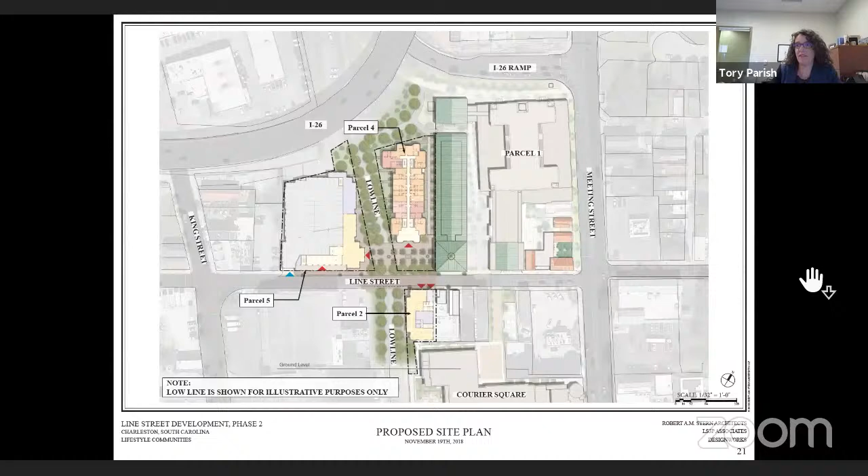We just have a few slides of the project. To refresh your memory.

This is a vested right 2nd year approval extension requiring automatic board approval if submitted in a timely manner, which is good for 1 year and may be renewed 4 more times in 1-year increments. Per ordinance section 54962, this extension is to expire on November 28th, 2022. Approval of a second 1-year extension of conceptual approval to expire on November 28th, 2022 is our recommendation.

Okay, do I hear a motion from the board? Move for approval. Okay, and a second? A second, Carol Wheeler. All right, motion made and seconded.

I'll call the roll. Ms. Subcheck, how do you vote? Yay in favor. Mr. Metters? Yay in favor. Ms. Wheeler? Yay in favor. And I vote likewise. The motion carries 4-0. Okay, agenda item number 2 is 52 Line Street.

Request second 1-year extension of conceptual approval originally granted February 13th, 2019 for parcel 5, Cannonborough, Elliotborough, Old and Historic District. We've got a few slides to refresh your memory.

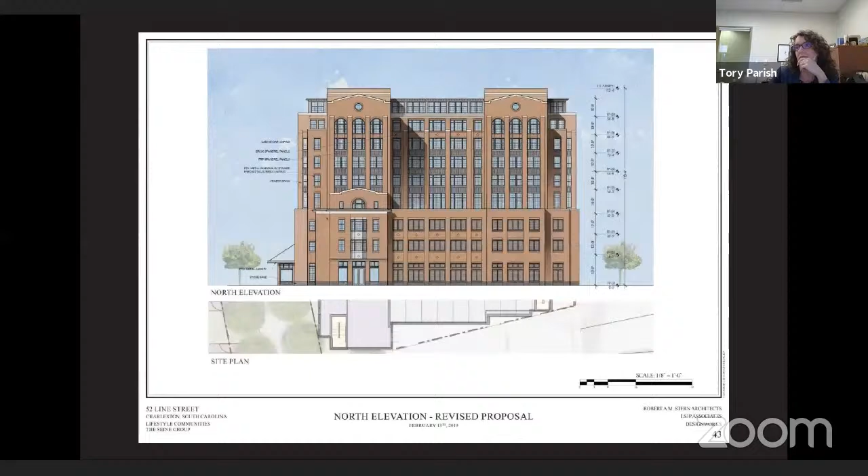Whoa, so fast, just trying to open something. This is a vested right 2nd year approval extension requiring automatic board approval if submitted in a timely manner, which is good for 1 year and may be renewed 4 more times in 1-year increments. Per ordinance section 54962, this extension will expire February 13th, 2023. Recommendation is approval of a second 1-year extension of conceptual approval to expire on February 13th, 2023.

Hearing all that, do I hear a motion from the board? I'll make a motion. Okay, go ahead. I'll give the motion to Mr. Metters. Ms. Wheeler, would you give a second? Second. All right, there we go. All right, I'll call the roll.

Ms. Subcheck? Yay in favor. Mr. Metters? Yay in favor. Ms. Wheeler? Yay in favor. And I vote likewise. 4-0, it is approved. Sorry, Carol.

Number 3 is a request for first 1-year extension of approval for partial demolition of rear 2-story addition. This project is at 284 King Street. It's downtown Old and Historic District. And we have Tara Romano here.

I want to see if she wants to add anything. Tara, are you there? Tara? Hey, sorry, no, I don't have anything to add.

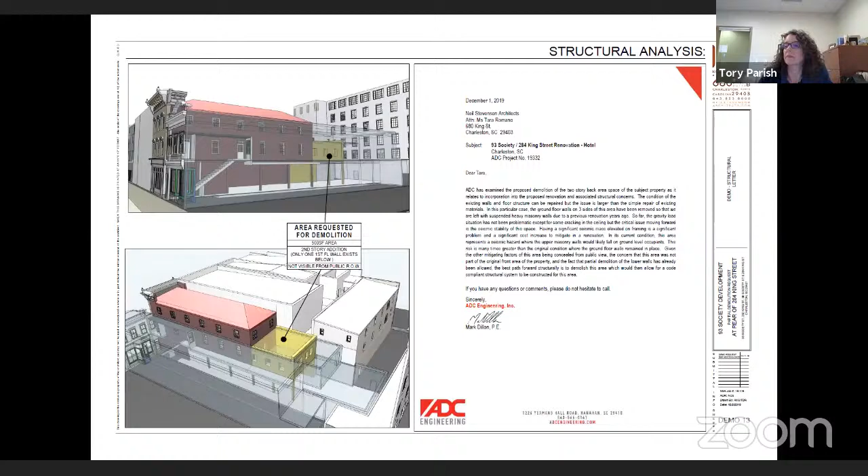This is a vested right, first year extension requiring automatic board approval for partial demolition if submitted in a timely manner, which is good for 1 year and may be renewed 4 more times in 1 year increments. Per ordinance section 54962, this extension will expire December 11th, 2022. Recommendation is approval of a first 1 year extension of approval for partial demolition to expire on December 11th, 2022.

Okay, all right, motion from the board. This is Carol Wheeler, I make a motion for approval of a first 1 year extension of this project. Okay, and a second? I will second. All right, I'll call the roll.

Mr. Metters, how do you vote? Yay in favor. Ms. Subcheck? Yay in favor. Ms. Wheeler? Yay in favor. And I vote yay in favor. 4-0, the motion is approved. Thanks, guys.

Okay, moving on to agenda item number 5. 609 King Street. The request is final approval for partial demolition, stabilization, and relocation of the structure. The building is not rated. It's in the Cannonborough, Elliotborough neighborhood, constructed between 1925 and 1935, and it sits within the old and historic district.

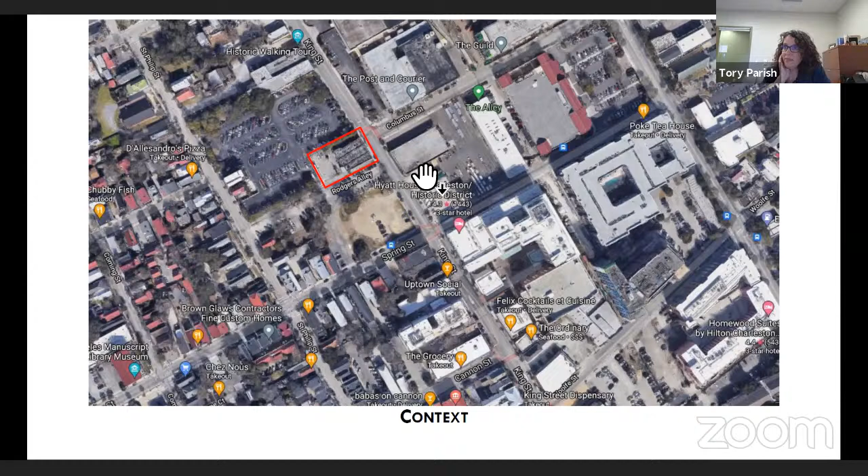Got some context slides for you here. An aerial, you'll see King Street, and the building sits at the terminus of Columbus Street next to Rodgers Alley. You're probably very familiar with this. Looking sort of south on King Street, and looking south, and then looking towards Columbus Street. And then we've got an old survey card from 1985.

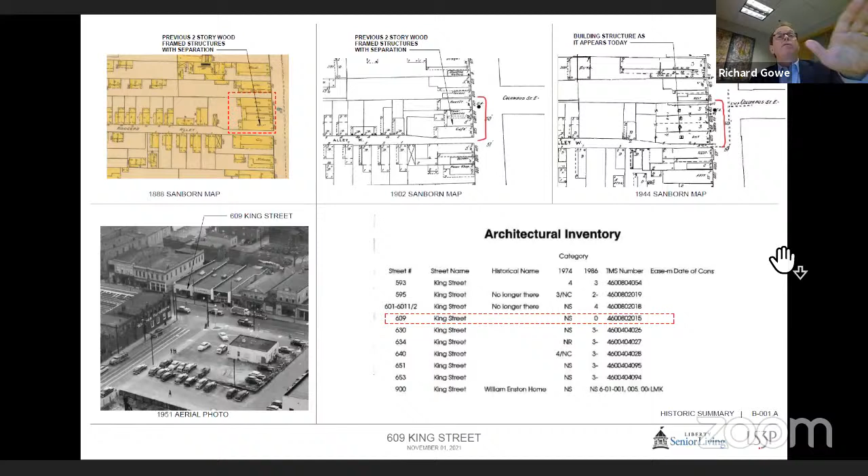It's interesting when you look at the Sanborn maps, the relative variety of the depths of buildings compared to the widths. In particular on this map, you can see the frequency of change from 1888 to 1902 to 1944 in the subject structure — three different periods of mapping, three different depths. So our conclusion is that the width is more important than the depth when it comes to creating a streetscape such as King.

These are close-up images of the facade. We have captured all of this detail in our scan and placed it into a Revit model to document the building. In general, this particular facade, which we consider to be most of the contributing fabric of the structure, is made of brick with a stucco skin over it, and all of those moves made on the facade are from turning bricks and pushing them in and out.

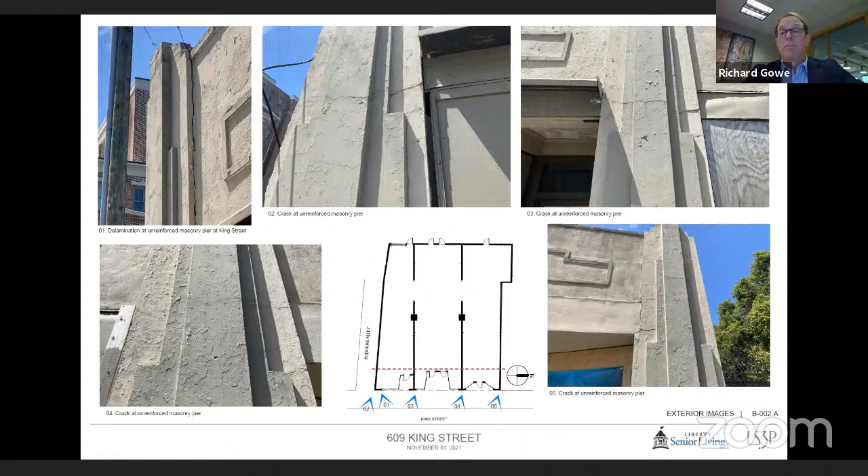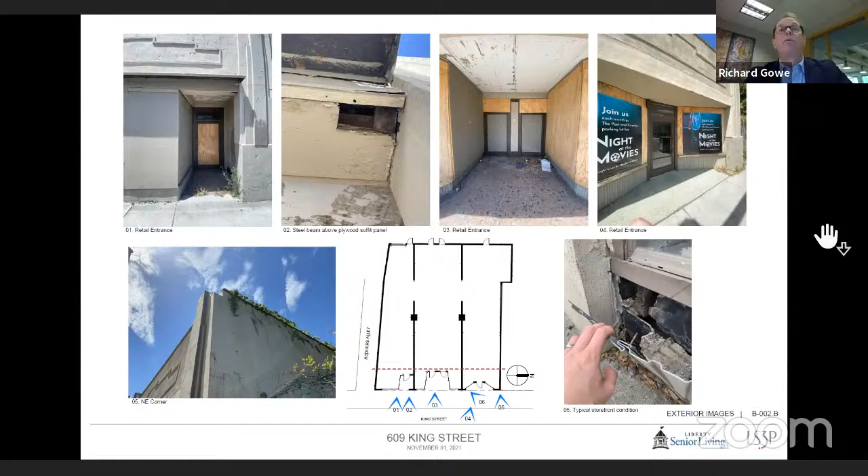This is the north wall. And this is the south wall. You can see we have a line drawn here that signifies about 12 feet off of the facade. This is the minimum we think needs to be saved to capture the essence of the structure and most, if not all, of the contributing features of the building.

In conversations with the historic groups, we did suggest 25 feet as a starting point would work. That would extend just past the first drop in the parapet, just to the left of that red line, and it would incorporate another one of the little hidden windows that was put in and then covered up.

When we look ahead to the next agenda item, you'll see why we suggest 12 feet. Because of the placement we're asking for this building to be moved to, we have the option to save a few more feet of the south facade in an effort to increase the amount of historical fabric. We are willing to do that. We want you to know that even though these documents say 12 feet, it's not a hard and fast number. We consider this facade to be the contributing fabric.

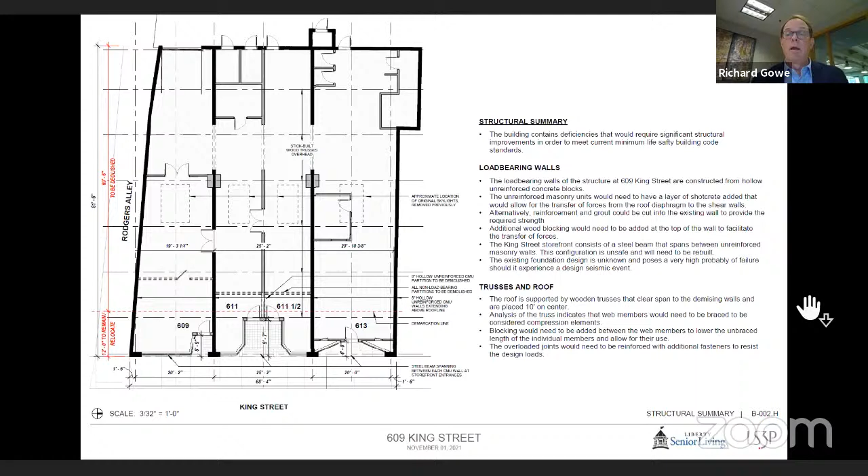We don't move buildings for a living, okay? We generally renovate buildings and do new buildings, but we've taken this very seriously. We spoke with a company called Carolina House Movers, who have an engineer they work with, Eddie Porcher. Based on their review of the interior and exterior of the building, we are supremely confident they can accomplish the storefront facade relocation as proposed.

A design build engineer will prepare the design for the temporary bracing, the relocation methods, and the structural stabilization of the existing building. This same engineer will design the foundation for the relocated facade. A lot of thought has gone into this relocation—it's a major undertaking, and I'd like to share a few steps we think need to be taken, as discussed with Carolina House Movers. For reference, they've moved lighthouses intact, beautifully, plumb, and placed them in new spots, so they are the real deal.

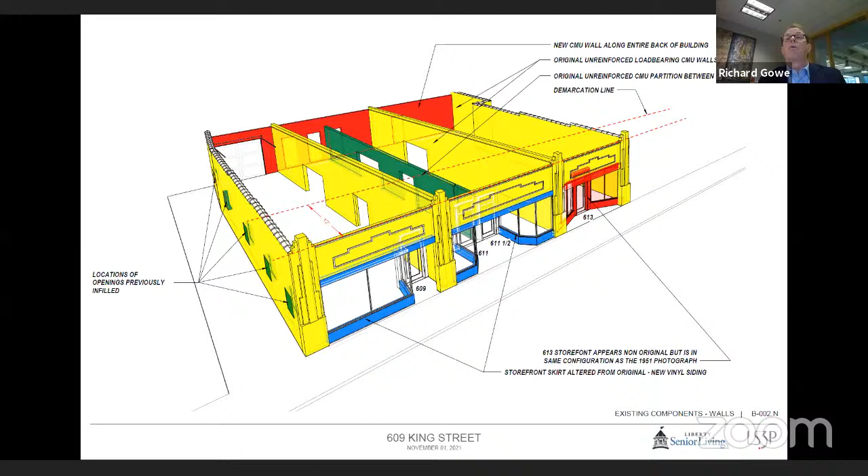Next, and my colleague Mr. Risch has prepared another slide showing in more detail, indicating that the decking appears to be all non-original. The framing is a standard pre-1953 2x common framing, as is the ceiling framing. The trusses are 2x material as well, appear to be original. I will say that they are original, but the detailing isn't very unique in any way.

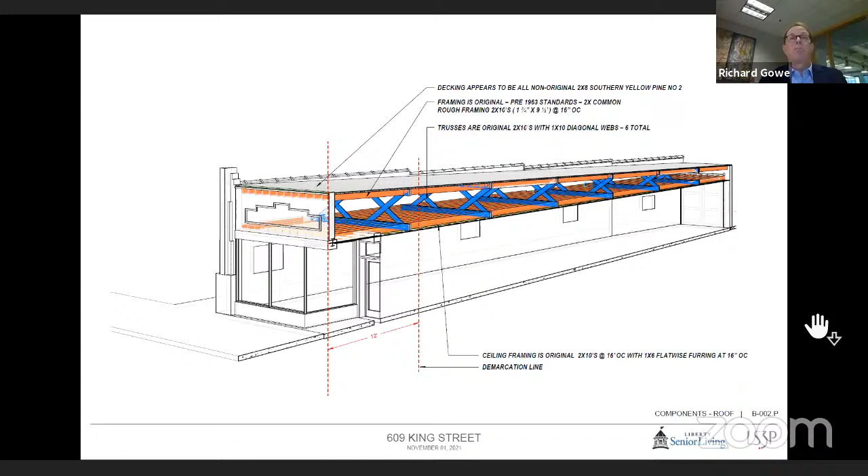It's intact. You can see the line of demarcation that we're proposing here, just past that first truss. Next.

And here is a section of what we would be saving and the configurations, and we have a lot of details, and we'll produce all the details. Would you please go to the last slide in the packet - I'll just make some closing remarks.

We appreciate the input of the historical groups and the city in getting to this point, and we hope that the board sees this as a win-win for the neighborhood, the historical groups, and the development team. And to any skeptics in the crowd who might not want to set a precedent, we could say this.

There have been entire buildings moved in the city previously, including a church building from Pitt to Calhoun Street. A building was moved during the renovations of the county courthouse and sits proudly on Broad Street today. And multiple buildings we were involved with over on the Line Street project.

Moving buildings is not for any project. It's for projects that have greater good and urban implications, and here are a few reasons we think this is a good candidate. Its contributing fabric, although relatively small, is very important in a cultural way, but where it's located is not necessarily that important. And it's pretty easy to achieve moving something of that size. So we think that's a criteria.

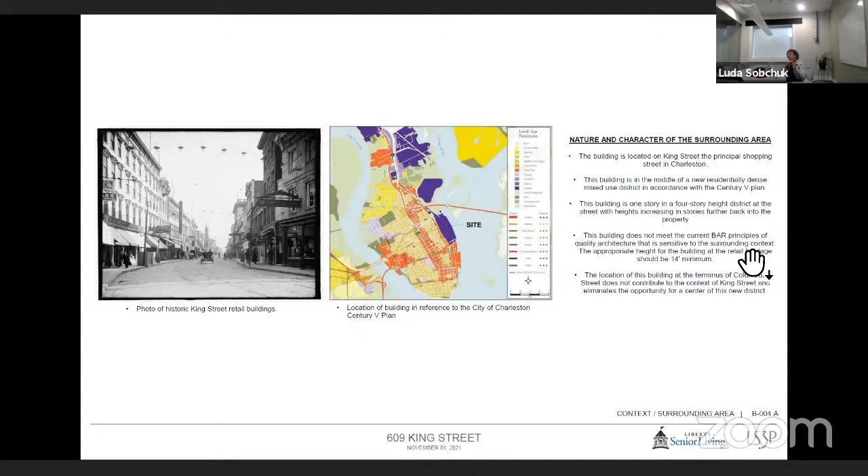That's kind of what I'm saying. So I'm still thinking that we can— I would support the relocation and partial demolition, but it needs to be much more meaningful than it is right now.

Mr. Chairman, James, go ahead. I think that, if I'm understanding everyone correctly, there is going to be support for relocating the structure, but there needs to be a plan resubmitted showing an increased depth of the slice area that is to be relocated. Is that what you're hearing also? That is what I'm hearing.

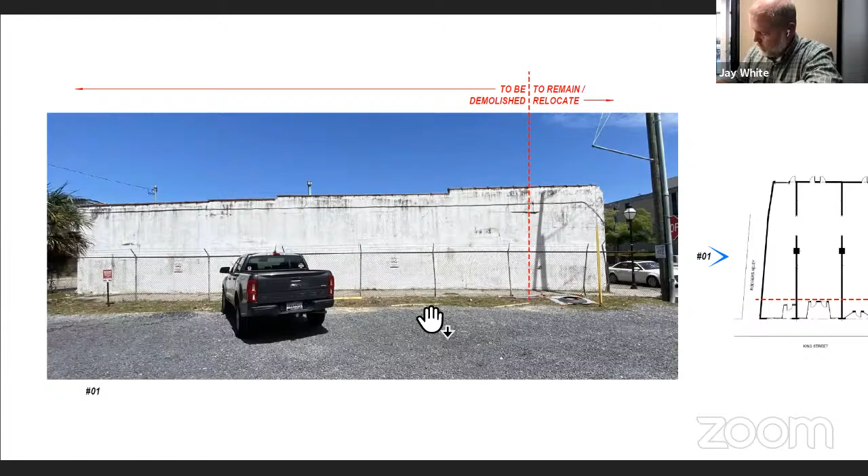Well, so Mr. Chairman, I would make a motion for a— I'm sorry, James, I'm sorry. May I ask a question?

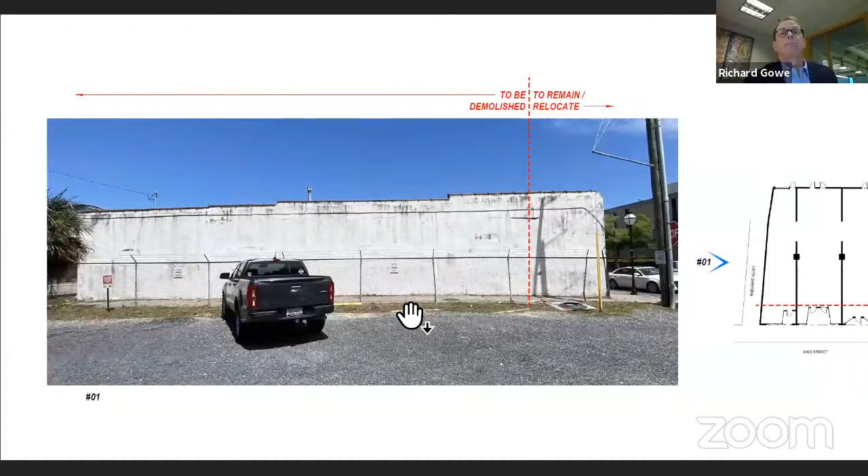Richard, could you preserve that whole wall as it is on this photograph and incorporate it? If you would, go backwards and look at the plan. Well, I don't know if it's of any value here. I'm just asking, and if my colleagues think it is of value, I don't know. But I think 25 feet definitely past that first step is definitely possible. The wall does angle in a great deal. Okay, but the first 25 feet would be okay.

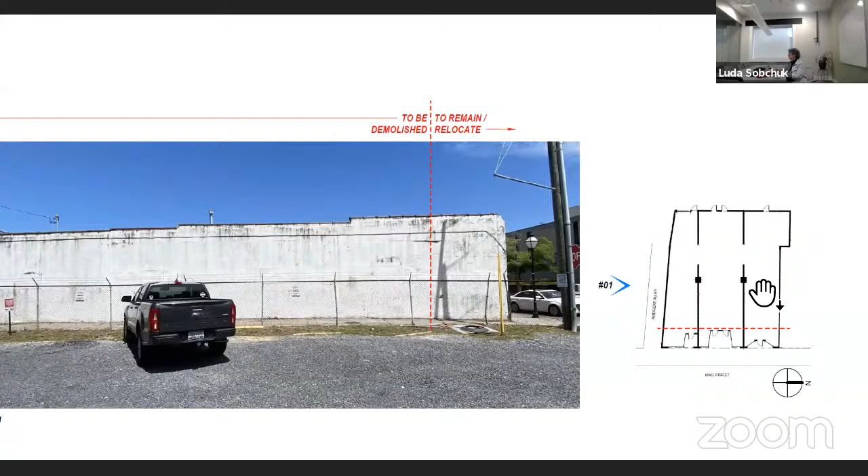You were just talking about some kind of history that will be shown on that alley, so I didn't know how you're going to do that, but anyway, that's sort of settled here. I mean, that wall could be, if you're showing a mirror or whatever, I don't know. I'm done, sorry. Okay, any further comment or motion?

James, are you going to do it? I cut you off, sorry. No problem.

Mr. Chairman, I'm going to ask a question before I make my motion. Would you like to ask Richard if he'd prefer to simply withdraw in order to come back with a different depth he could slice the building to, or would he prefer a deferral with a specific request?

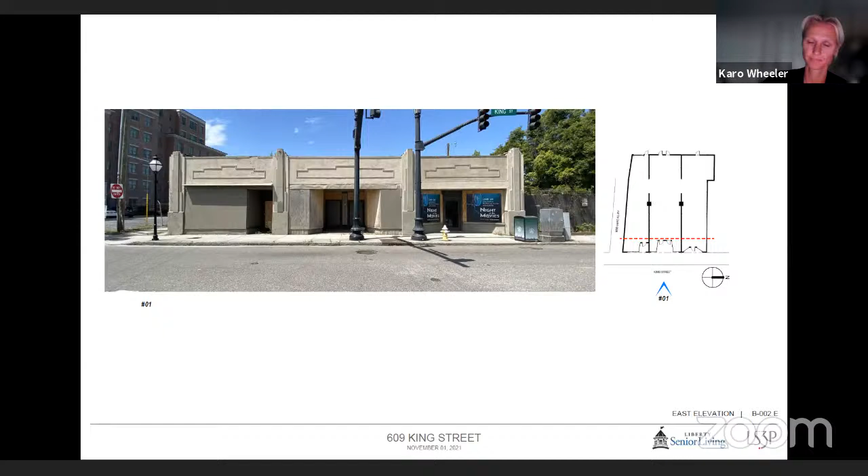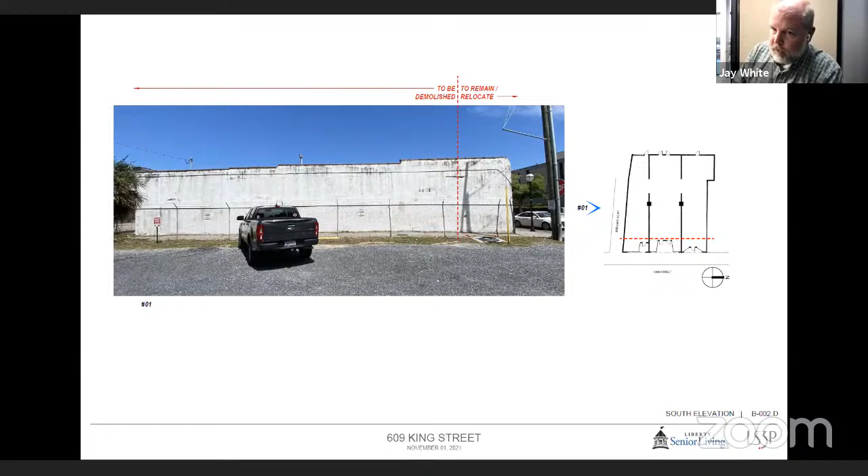Maybe all of that can be restated as just restudy the depth of the slice. The way I might suggest it be written is as a motion for deferral, requiring that the applicant restudy the resulting building depth in accordance with board and staff comments. Sounds like exactly what I said.

So just to restate that again, this is a motion for deferral with a requirement to study the resulting new building depth in accordance with board and staff comments. Correct. So Mr. Metters has made that motion. Do I have a second? I'll second that. Motion made and seconded, I'll call the roll.

Ms. Wheeler, how do you vote? In favor. Ms. Sobchak? In favor. Mr. Metters? In favor. And I vote likewise. The motion carries 4-0. Thank you.

All right, procedural question. Does that mean that agenda item number 6 is heard or not heard, Mr. Chair? I think this may have broad implications on the height, scale, and mass of agenda item number 6, so I don't think we can hear it.

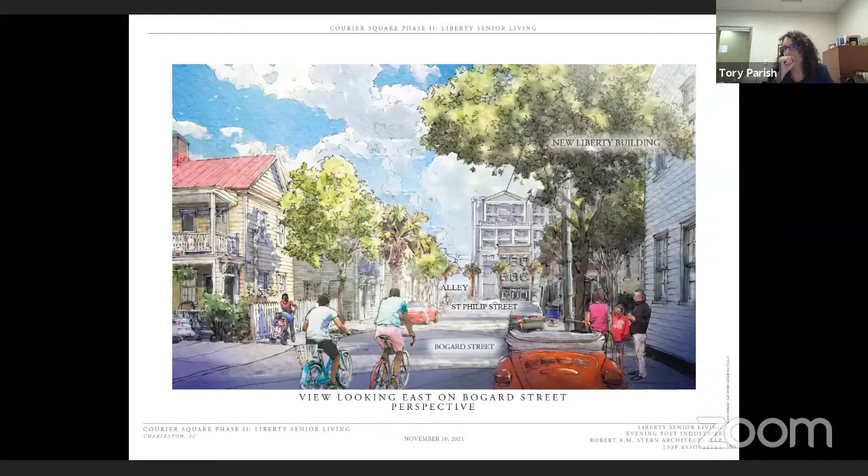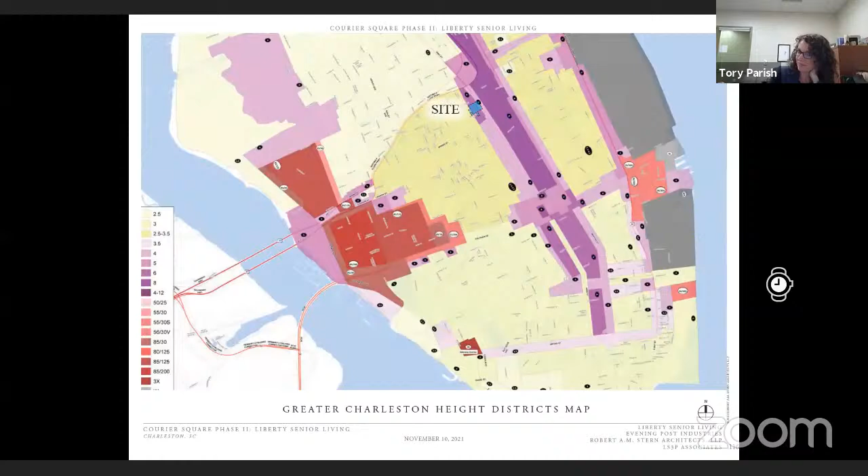Item 7's in there somewhere. Coming. I had visual staff comments for you this time.

Okay, item number 7. Here we go. 649 King Street. This request is for conceptual approval for a 15-unit apartment building with ground floor retail. It's Courier Square Phase 2, Building 2, Cannonborough, Elliotborough neighborhood, Heights District 6, Old and Historic District. The context is something you're very familiar with, as it's north of the block we just discussed.

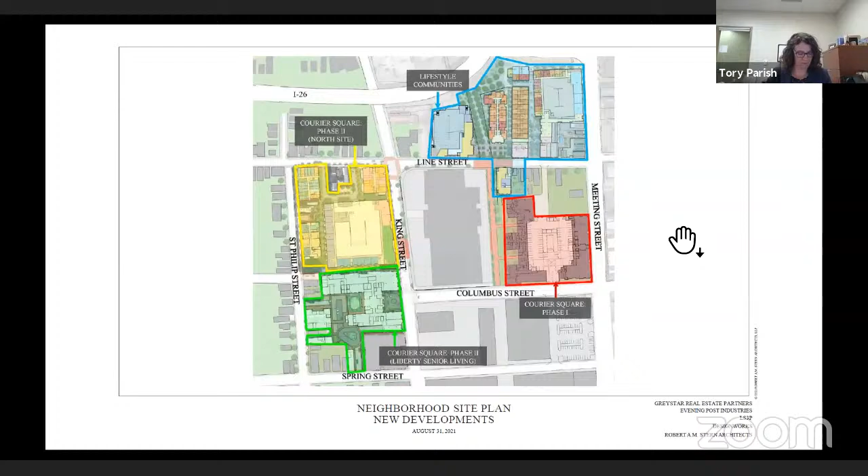But I believe we are jumping right into the applicant's presentation. So we should have Mr. Gow, Brewer, and let me see what else we need. I should have everybody in the meeting on the applicant team. So we're ready when you are.

Rich, are you going to start? Yes, I'm Richard Gow with LS3P, here with Greystar, Evening Post, Rams Design Works, and Seaman Whiteside to talk about the changes to buildings 2, 3, and 4. This is building 2, and I'm going to defer to Mr. Brewer. This is Gary Brewer, partner at Robert Stern Architects. We're glad to be back again.

As has been noted before, we're very dedicated to doing the best building with our team possible for these 3 separate sites. We are passionate at times about our opinions, but we value working closely not only with the board but with Historic Charleston, the Preservation Society, and the neighborhood groups, to work together as we have on the last 7 projects we've brought before this board, to build the best building possible for these sites. Next, please.

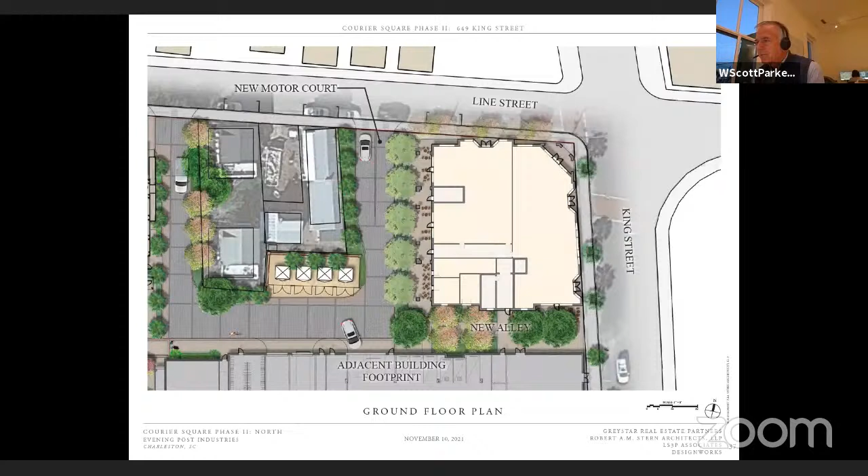Included in the project will be new streetscape all the way around King Street, Line Street, and St. Philip Streets. So that's an overview, and I'll turn it back to Gary. Thanks, Scott. Next, please.

So here you can see the floor plans. Based on the board's comments, we have worked to address those comments, which have included not only changes to the exterior that we will be showing, but also reconfiguring some components of the interior to work with the new proposed exterior. Next, please.

So the summary of the board and staff comments - the basic 2 points were the facade facing King Street, which everybody thought was the most successful facade, and there was concern associated with treating this as a two-building expression in our attempt to address the neighborhood's materials of clapboard. So we have addressed those in the new proposed design. Next, please.

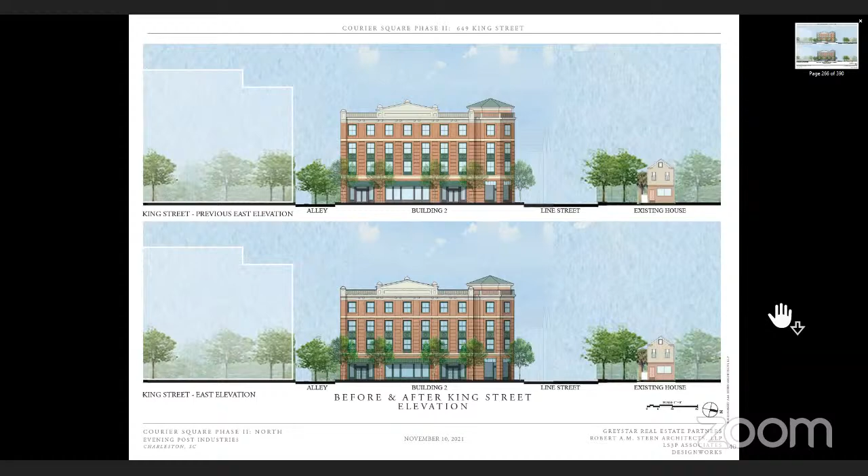So this is the before and after of the facade facing King Street. Next, please. With the plan showing that facing towards King and Line Street, there would be retail at the base. Next, please.

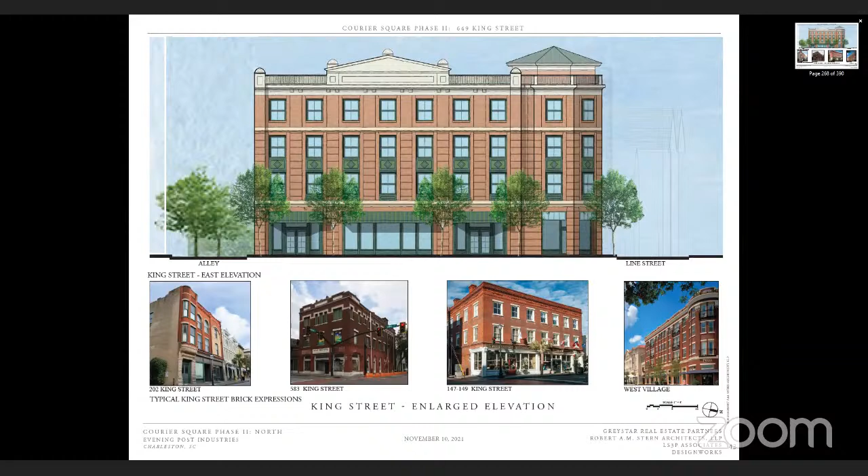Here you can see it at a larger scale, and we're looking closely at brick buildings in Charleston, primarily on King Street, for the inspiration of this design. Next, please. Getting into a larger scale elevation, showing potential ideas of materials and detailing. Next, please.

And then moving around to the north facade. Next, please. And the proposed design - I'm sorry, can you go back one? The earlier design showed two expressions, with a brick and a clapboard building with a party wall, in an attempt to relate to the materials of the adjacent houses. The proposed design on all sides of the building now shows an all brick building. Next, please.

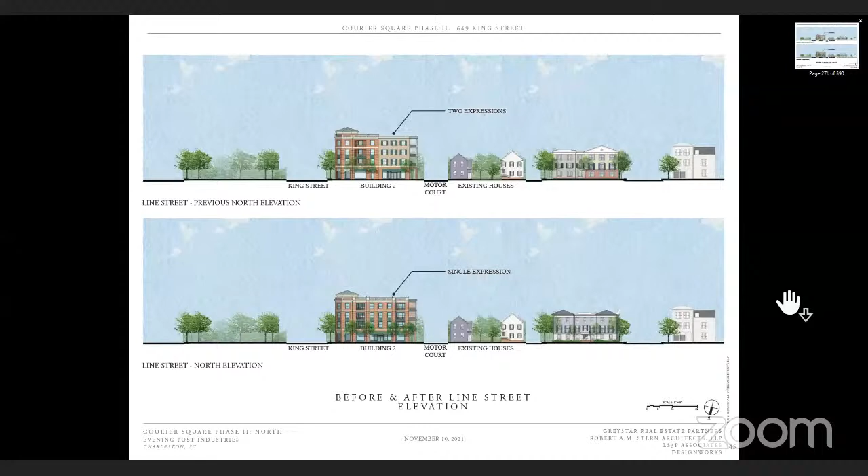Which you can see here. Next, please. Here you can see before and proposed on the bottom. Next, please. And here you can see it with the plan, retail facing at the ground level on Line Street and King Street. Next, please.

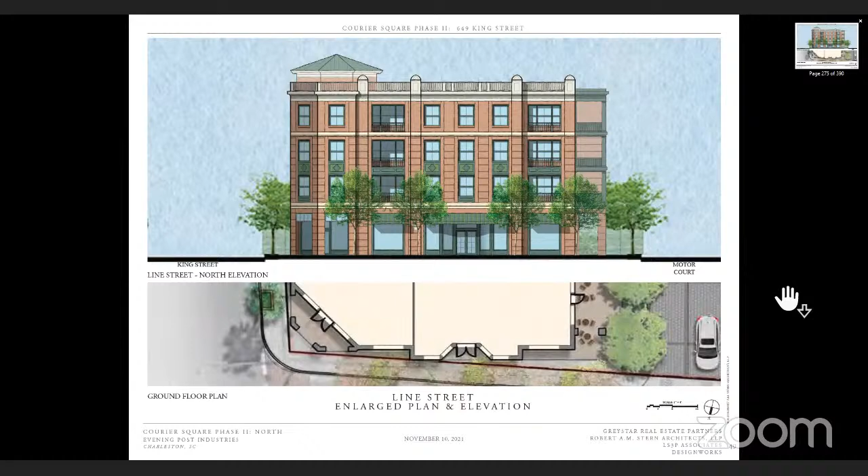So we have kept the corner tower element that we will talk about shortly, but in changing this to an all brick facade, we thought it was important to break down the scale of it with a center vertical mass that makes the length appear less long and relates better to the scale of the residential neighborhood. On either side, we have a built-in porch and a Juliet balcony brought down to the ground with 3 bays of retail. Next, please.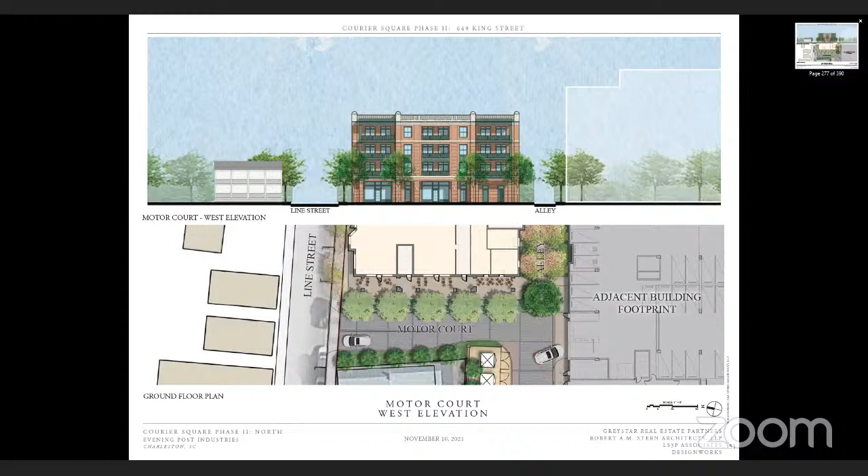And here you can see it at a larger scale. So again, with the facade facing towards King Street having a more mercantile expression, and in the spirit of simplification, the 3 other sides have a very similar expression with a center mass and 2 side wings. In this case, to provide the balconies and the shade and shadow associated with it, and the liveliness of having a balcony facing the motor court, we have balconies flanking either side. And then at the base of the building, the new design shows the space off of the retail, all underneath a porch-like structure with 2 retail storefronts, and the idea being that there might be outdoor dining there. Next, please.

And then here you can see it at a larger scale, starting to get into the materials of the brick and what could potentially be metal balconies, to be studied in future phases in preliminary. Next, please.

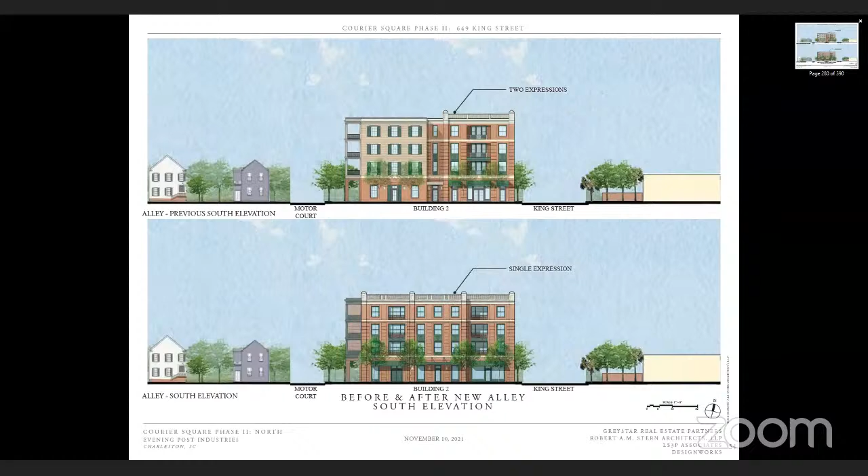And then finally moving to the south elevation, which is the elevation that faces towards the new alley Scott just spoke about, moving from a 2-expression building to a singular expression building. Next, please. And here you can see it with the alley and the adjacent building number 1. Next, please.

Again, similar to the north, west, and south, we have a center mass that projects out with side wings. Here we have the balconies on the right and left. Since this becomes an entry to the building, we have a canopy at the center front door, and then awnings to the right and left.

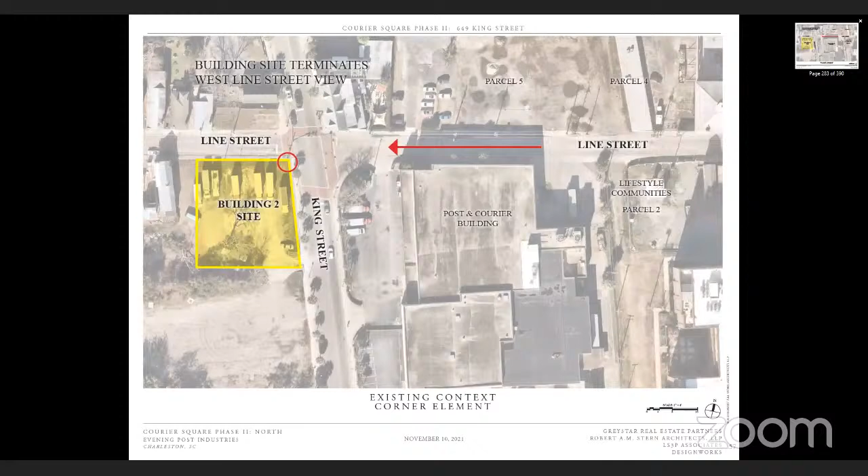As noted earlier, the view down Line Street with this site provides an opportunity to terminate the view. You can see where the red circle is.

Again, looking towards examples in Charleston of buildings that terminate corner views.

And then a perspective view. The existing site.

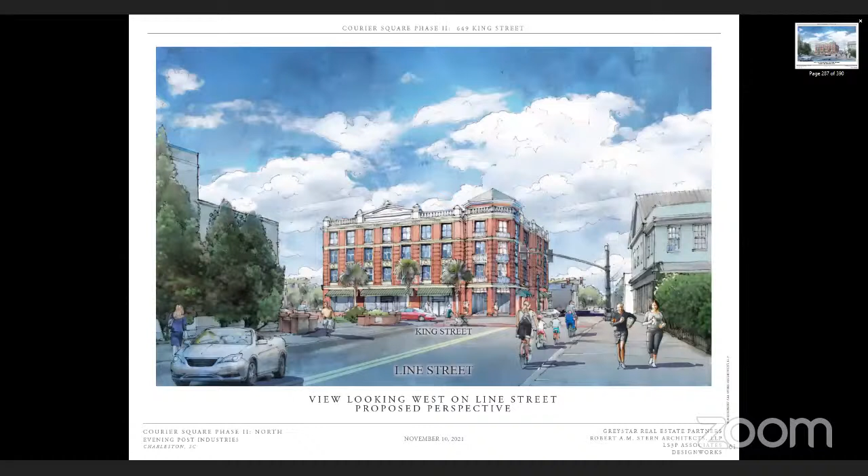Here you can see in the rendering the Line Street facade being changed all to brick. I know there were comments and concerns about the height of the tower and even the gable facing towards King Street. Those are comments we would typically address in a preliminary review. We think both are important. For the gable, it's especially important considering this is a corner site adjacent to a taller building, so we think that gable is important to hold the scale of a 4-story building, and of course the tower at the corner to terminate the view.

And here you can see it at a larger scale, with the Line Street facade being changed to all brick.

And then a view to the alley. Keep in mind, this is buildable space, but as part of this design we are proposing a new pedestrian alley.

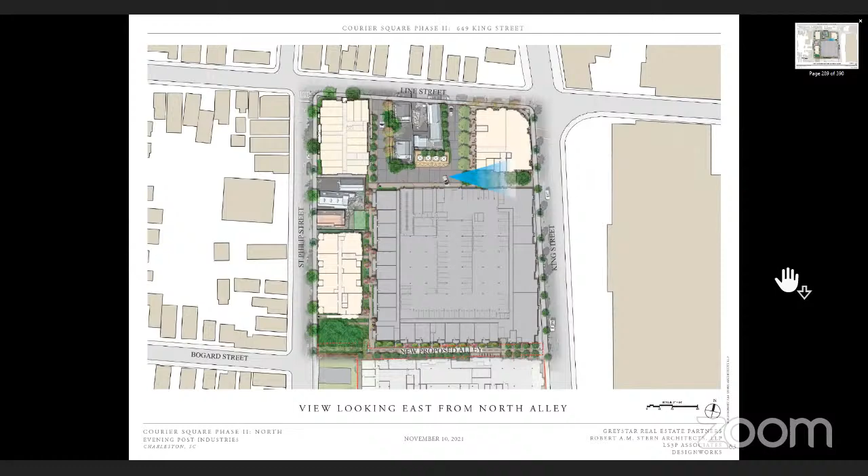The existing view towards King and the Post and Courier building. And then an evening view looking towards King Street, with the building we're discussing on the left, and the building we call building number 1 on the right.

Rich, you want to talk about this slide? Yes, generally speaking, it's a 6-story zone, and we unilaterally gave up 2 floors to be better in scale with the neighbors across Line Street and adjacent on Line. Thanks, Gary.

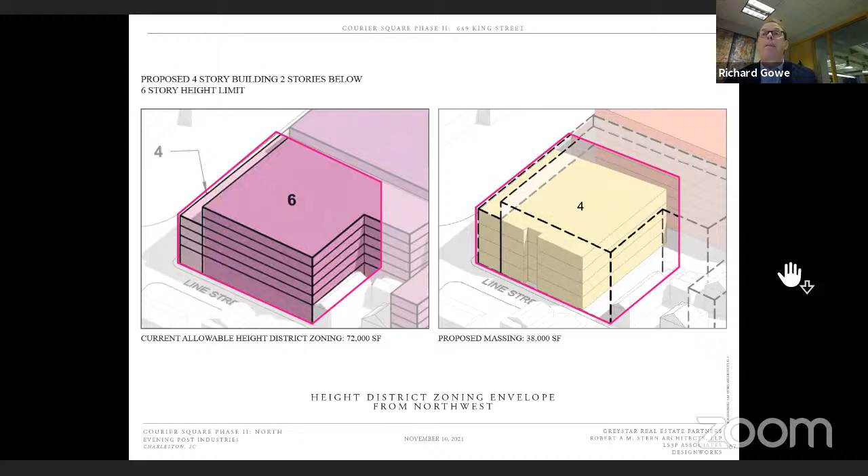So that's the end of our presentation. Thank you.

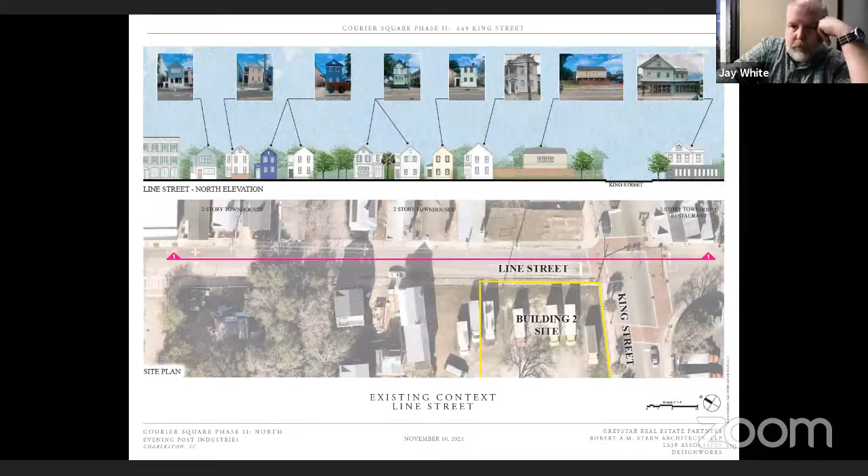Okay, Tori, may I say a few words? Yes, you hear me? Sorry, I know y'all are sick of hearing from me lately. I was invited in early, but just a couple words on behalf of the developer and partner, Ben Liebechild with Greystar, speaking on behalf of Greystar as well as our partner Evening Post. I would ask that this just be a quick intro, I won't speak again on 3 and 4 to hopefully move quickly.

So I'll kind of just speak to all 3, but I wanted to quickly note our approach on this project remains the same. We're here to be good neighbors, good stewards for this neighborhood. We've had a pattern, I think, of nearly a year now of patience, involvement, and outreach, especially on the design piece as well.

Obviously a tough night at BAR last time we were here for these 3 buildings, but I do want y'all to know that the most important thing is we listened, we reacted. We went through all of the comments from the BAR, as well as those from Preservation Society, Historic Charleston, and city staff. We organized them, we siphoned them, reviewed each one. We did our absolute best to find common ground. I think we all know not everyone agrees in this city, but I think there was some common ground we really did our absolute best to address.

We've had multiple meetings with all those groups after the BAR. We even put options in front of some others to gain opinions and further get feedback. Through all that process, this building probably changed the least of the 3, but you'll see some substantial changes on the others. We believe, the design team believes, this has resulted in a much improved design, not only for this building, but for 3 and 4.

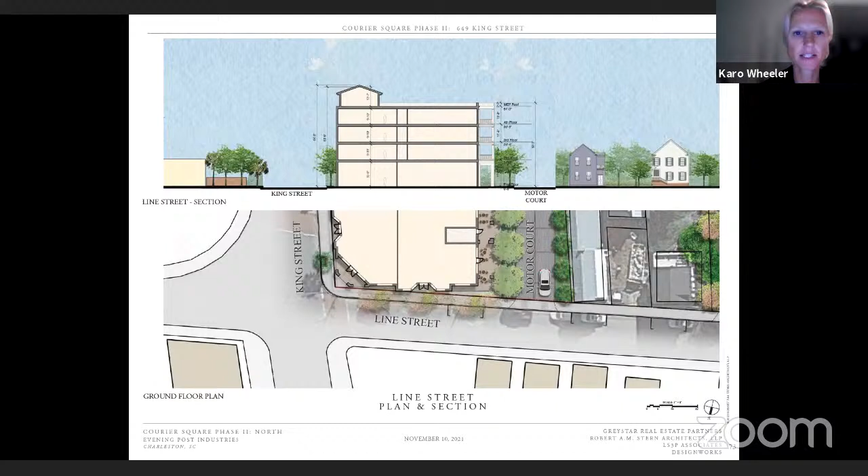Okay, any questions from board or staff of the applicant? This is Karo Wheeler, I have 2 questions. First question is related to the tower element, and I was just curious if that's accessible, since it's pretty large height, but I didn't see any fenestration or doors. Is that basically just an attic space, or is it accessible? Rich, do you want to talk about the plan?

Well, the tower is there right now in height, scale, and mass to create a terminus. On other projects, as we moved along, we would contemplate opening it to the exterior or having it be some other feature. I'm not sure we have exactly determined that at this point, but it's an important thing. A lot of people talk about it, and I appreciate you bringing it to our attention, because it's an important decision that has to be made.

Thank you. And then the second question was the previous staff comments from the September 22nd meeting. I think staff comments 1 through 4 requested specific studies of the window sizes and the storefront alignment and other items. Do you want to talk about that, since I don't see any changes or reactions to those 4 comments? Do you have any input on that?

Yeah, this is Gary. We looked at the King Street facade, and where the gable is at the pediment at the top, you can see the brick piers on the right and left come all the way down to the ground. And you can see at the outside corners, those brick piers come all the way down to the ground. So the issue associated with the storefront in the center, we went back and looked at many of the King Street storefronts that often have wider storefronts than the fenestration above. So that was our conclusion, that it was within the patterns of what you see on King Street.

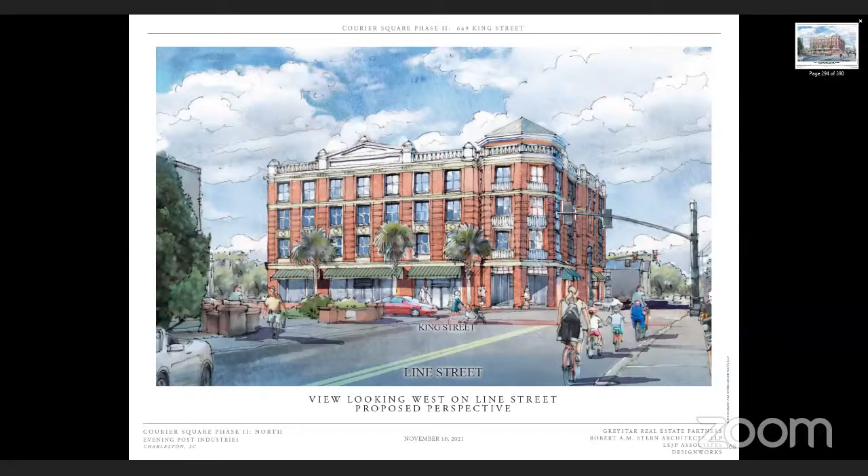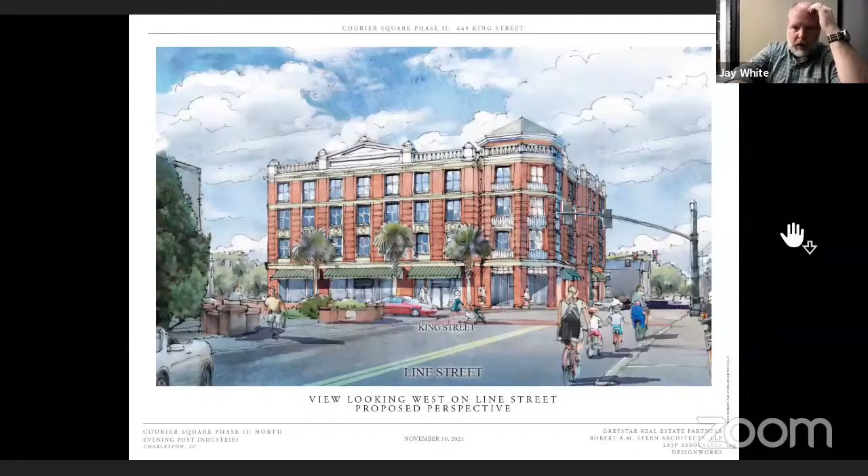I think the only written correspondence we had was from Mr. Hawkins, so that has been taken care of. Any further public comment that you're aware of? That's all the public comment for this one. Okay, well, what is staff's disposition?

Okay, staff's disposition. These are some staff comments. One, the use of a single expression is an improvement.

Two, while the rusticated base is welcome, staff is still concerned about the less common continuance of this treatment on the middle portion of the building, and found that it should be limited to the ground floor.

Three, the pediment to the east and the vertical portions of the building below it are unrelated to the massing and functions below. Vertical portions of the building at the east, north, and in one place on the south abruptly stop at the base level and are unresolved.

Four, like in the case of Courier Square, the corner spire cap is low and may only be seen from a distance. This could potentially be resolved by simply allowing the tower element to be taller without the visual break caused by the balustrade. And five, the balustraded parapet at the top may be a bit fussy and was simpler on the previous version. A recommendation is deferral with board and staff comments.

Okay, do we have an applicant clarification or response? This is Gary. As I noted earlier, all of these types of comments are typically, in our experience on other projects, things that we study in the preliminary phase, and in our experience haven't been the reason for deferral. So we're open to what the board has to think about that. All of these issues are issues that we would typically study in the next phase and intend to. Thank you. Okay, thank you.

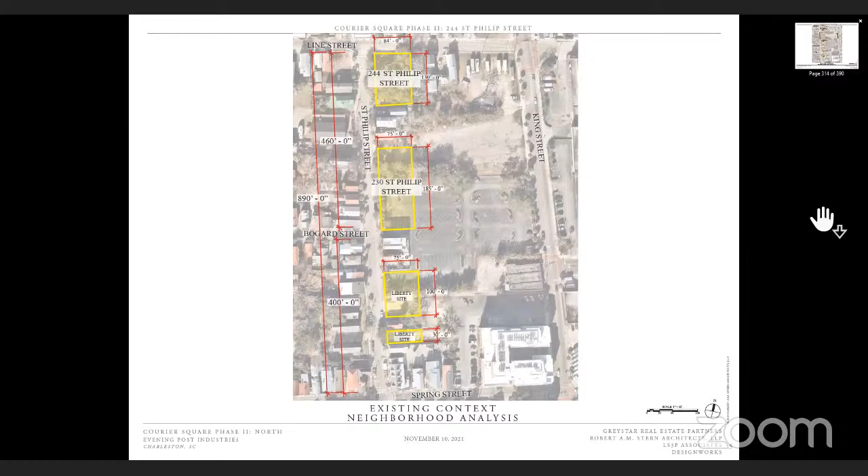This site is 84 by 130 feet, and you can see the adjacent single houses that are across the street and adjacent to it.

The plan of the building has units that are typically studio units, and you'll see on the exterior the expression of the windows is meant to reflect the plan of the building. On the north, west, and east sides, you'll see significant changes in the plan that relate to the new proposed design.

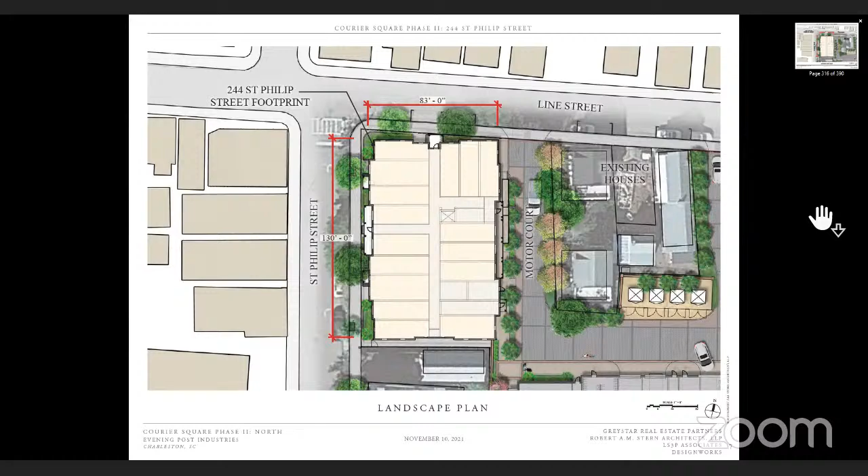Each of the plans. The staff comments were along the lines of simplification and studying the townhouse expression, which resulted in a multiple expression as a means to fit within the neighborhood, versus the possibility of studying it as a single expression.

Starting on St. Philip Street, you can see the earlier design at the top with the adjacent houses, and the proposed design at the bottom, which moves from a multiple townhouse-type expression to a singular apartment building expression.

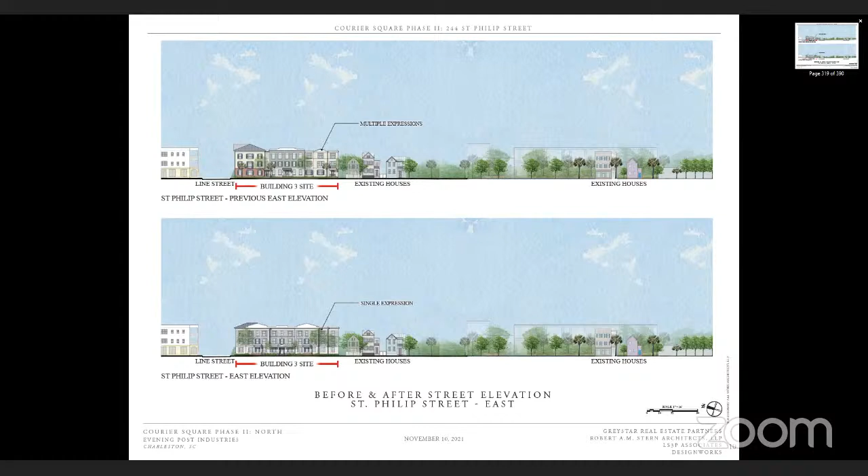Here you can see it with its plan, the earlier design at the top and the proposed design at the bottom.

The plan has been changed along the facade and the interior to work with the new single expression. The main entry of the building in the floor plan has been moved to be centered between the two masses on the right and left of it.

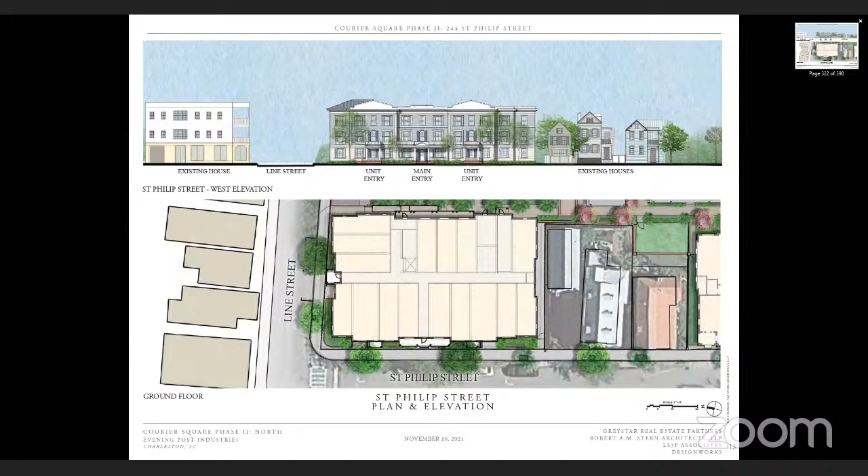Here you can see it at a slightly larger scale. These masses have been designed to be three bays wide, creating two scalar elements that react to the sizes of the residential neighborhood.

Each has an entry into the unit, which we think enlivens the street facade. With the central entry in the middle, the window types have been simplified, with the predominant window being a Serlian-type window without the arched window, providing adequate width as seen in the plan below, alternated with single windows and arched windows with shutters to give interest to the syncopation of the windows. At the top, we're using a simplified gable pediment often seen in Charleston buildings.

Here you can see at a larger scale the clapboard, traditional double hung windows, arches sized to the openings with hinges and shutter dogs, and traditional columns, entablatures, and cornices.

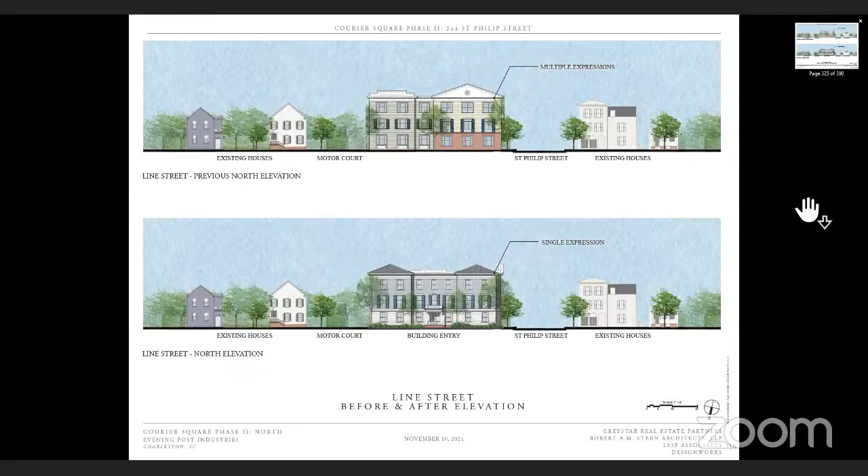Moving around to the north facade facing Line Street, the earlier design at top and current proposed design below, changed to a single expression, again with two masses working to relate to the footprints of the adjacent houses.

Here you can see it at a larger scale with the plan and the simplification from the side units. We have single double hung windows and a building entry centered, with two hipped roofs and a parapet connecting them as one.

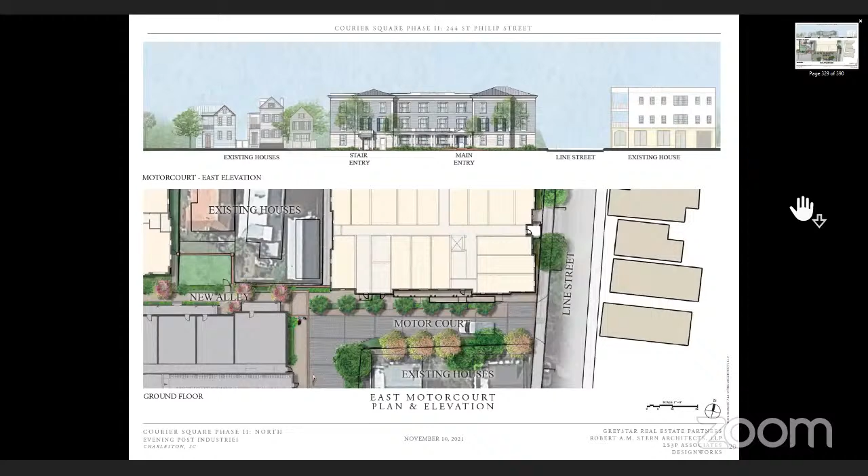Moving around to the motor court, the east elevation shows the earlier townhouse-type multiple expression being modified to a single expression, here facing the motor court.

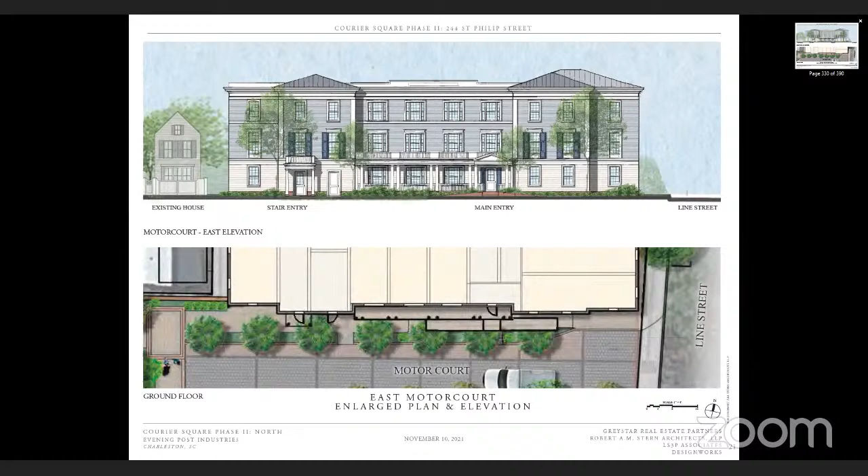At a larger scale, taking the look of the building facing St. Philip Street and translating it, in the spirit of simplification, over to the east elevation facing the motor court, with the predominant window type being the wider window with mullions and windows on either side, then a continuous porch at the center with a gable over the entry, and another porch facing the stair entry, again carrying the language of the shutters at the piano nobile, which are full size of the opening and half the width.

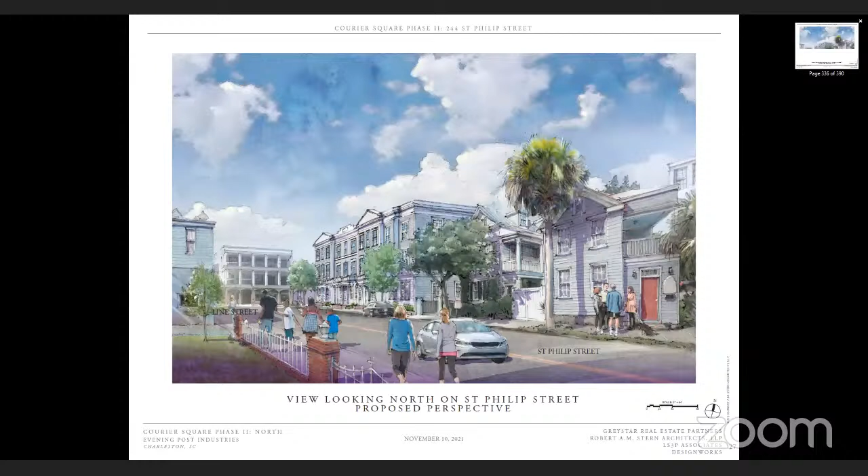And then the new proposed design with the St. Philip Street elevation, with a single expression and two pavilions with gables that are meant to respond to the height, scale, and mass and the character of the adjacent houses. And I think that's it. Or next, please.

Is that the last slide? Yeah, so if you could go back to that. So that's the end of the presentation on this. Thank you. Thank you very much.

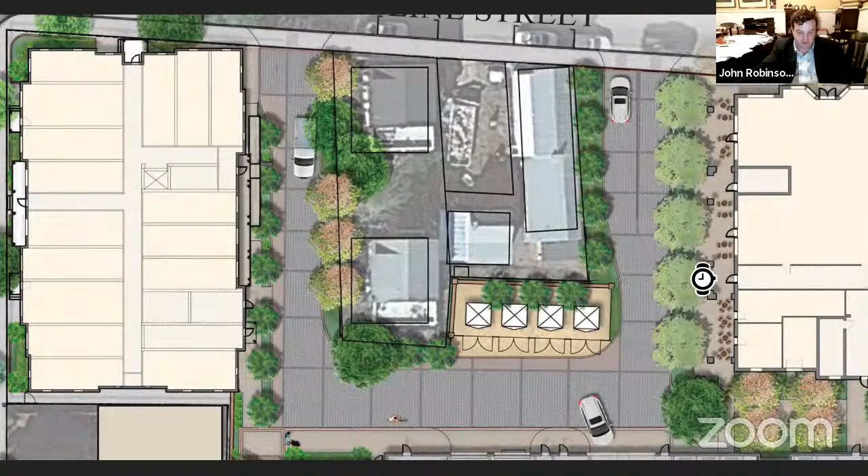Thank you, Mr. Chairman and board members. The design has been greatly improved by moving to a single expression instead of multiple expressions, and we appreciate the applicant's changes there. But overall, unfortunately, the design is really not compelling and looks like any suburban apartment block except veneered with good detailing. To resemble Charleston buildings, the concept needs a higher ratio of void to solid, basically larger porches, more depth. We find very problematic the use of wood siding for the exterior of a building of this scale and size.

Mr. Schwebler. Okay, Mr. Schwebler. This is Justin Schwebler with Historic Charleston Foundation.

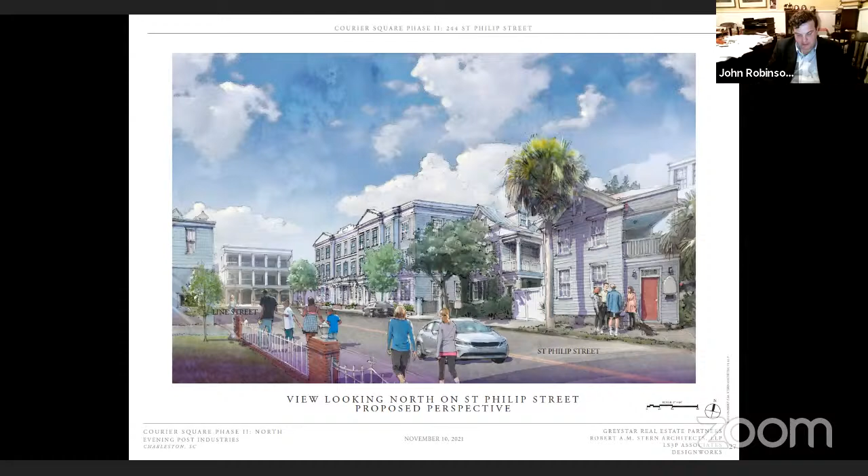Staff comments will begin with the use of a single expression as an improvement.

Number 2, the main porches on St. Philip Street and also in the alley are shallow, which causes the porch elements to appear more as a facade treatment. Recess this portion of the facade another 2 to 3 feet to mitigate the porch depth issue and to improve the massing. And to be clear, this is referring to the porches, not the stoops.

Number 3, the mix of hipped roofs with 2 different parapet profiles is fussy. Eliminate the hipped roofs to simplify the overall. Some of the parapets could be downplayed also.

At the east elevation, the dominant window pattern is the triple window, the larger center window with satellites. Typically, this would be a feature window, and this elevation could benefit from a simplification to the windows. Simplifying the windows would allow for consistency with the use of shutters and should be studied in conjunction with all facades. Confirm the basic window sizes for scale concerns.

And 7, where panels are employed below windows, this should be reflected on the first floor for a good hierarchy to the fenestration pattern. And the recommendation is deferral for roof simplification, slight massing modifications, and tweaking and simplification of overscaled elements with board and staff comments.

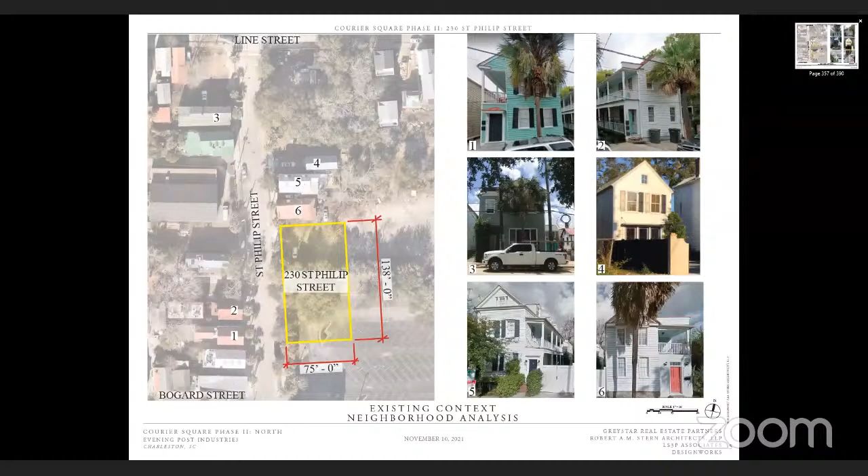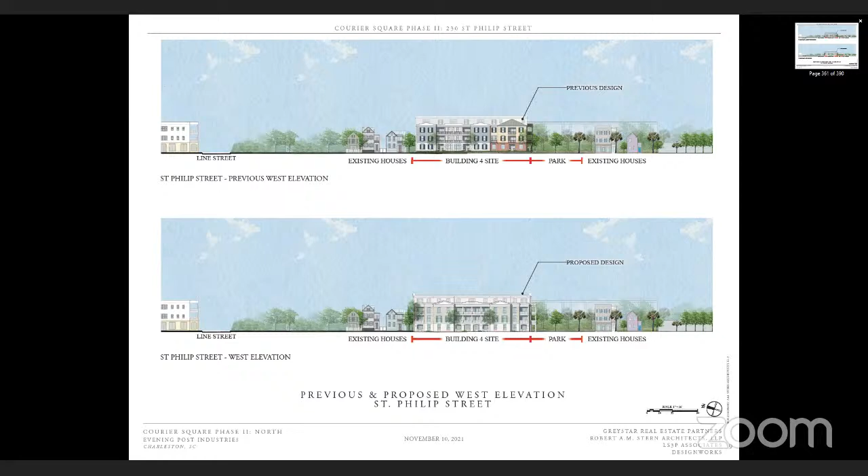So the staff comments basically broke down into simplification and studying a single expression rather than a double expression. Next, please. So here you can see the before and after in the context of the neighborhood and the adjacent single houses. Next, please. And the new proposed design and its floor plan in relationship to the adjacent houses. Next, please.

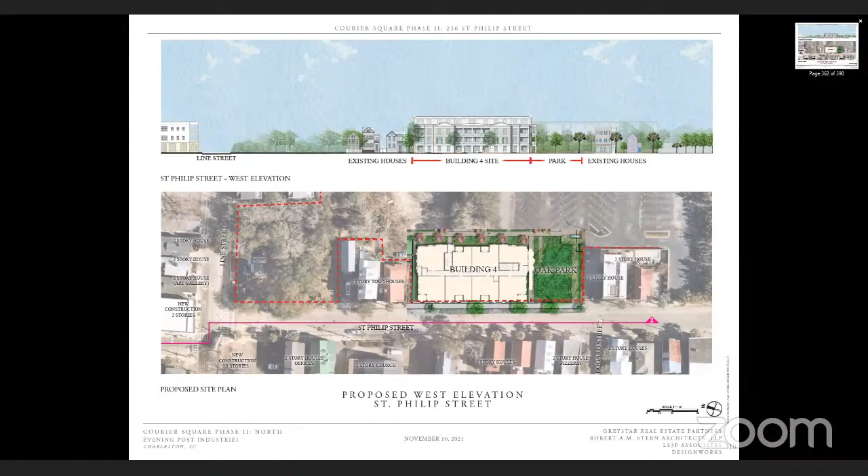Next, please. Here you see it with the plan. It has 4 entries into units off of the ground floor.

And here you can see it at a larger scale. This has 2 pavilions that are pulled to the center with a continuous porch at the 2nd and 3rd floor that no longer has infill because the plan has been changed with it. And then on the corners of the building, there are also porches, in our opinion, to help enliven the facade and break down its overall length, but especially on the northern side of the building to help relate to the scale of the existing house.

The proposed materials are wood at the base. We are showing a rusticated treatment with a belt course above it and then clapboard above, much like the 3-story wood precedent that was shown from Charleston in the earlier design. This design at the gables is meant to have classical details and a pediment with a raking crown with a cyma and a corona and a bed mold. And then the 4th floor is set back from the street, so it's not visible. We're also using shutters at the Piano Nobile to punctuate the 2 pavilions.

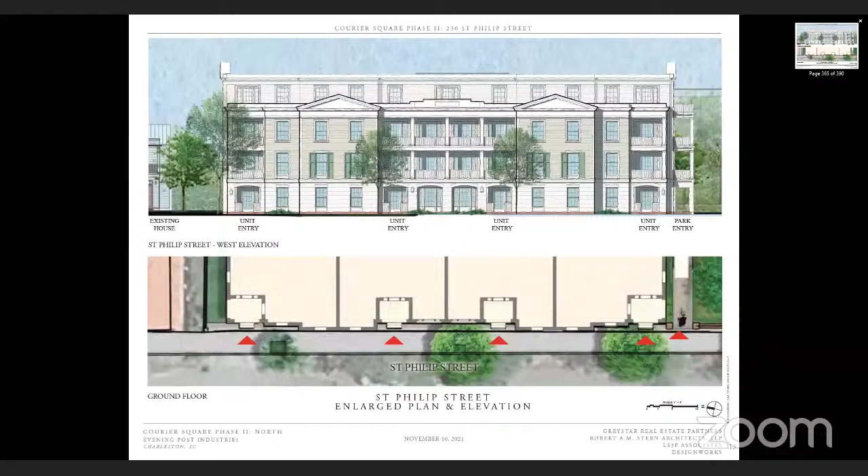Next, please. And here you can see it at a larger scale, showing the beginning development of the traditional details.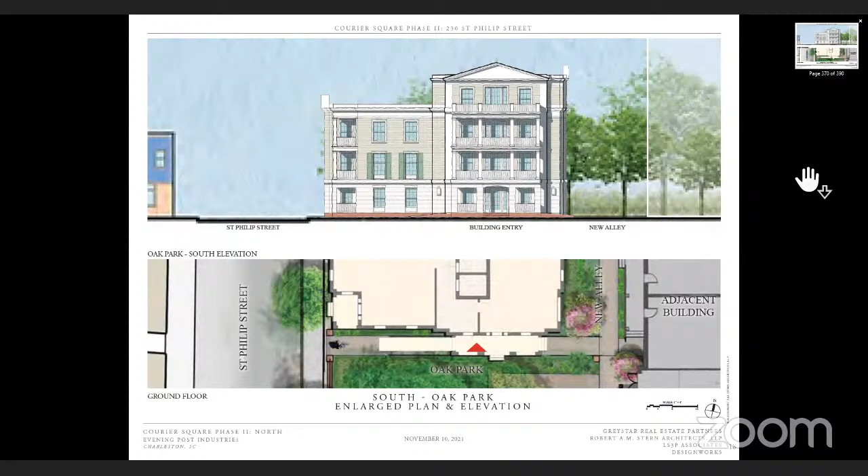Moving around to the east elevation, the previous design and the current proposed design. With its plan providing entries at the base or the ground floor of the building.

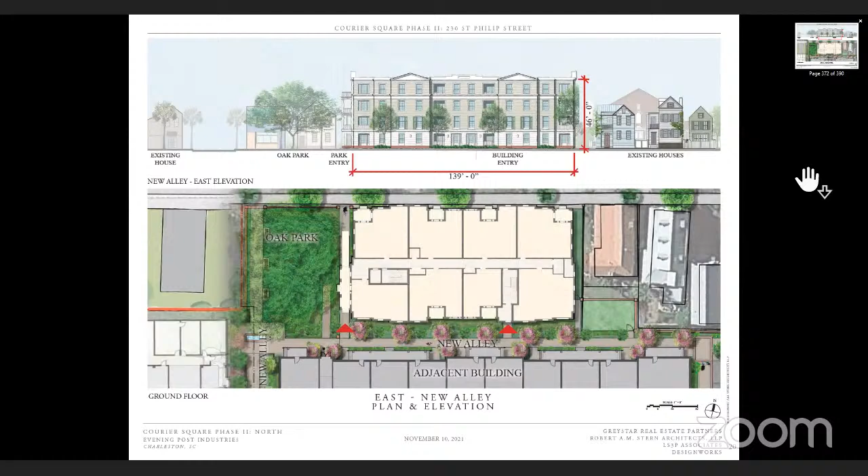And taking in the spirit of simplification, the massing and the detailing of the facade that faces towards St. Philip Street, along with some inset porches. I'm sorry, can you go back one?

And this is showing between the 3rd and the 4th floor, a major cornice and entablature to help bring down the scale of the building at the side that is 4 stories that is facing the new alley.

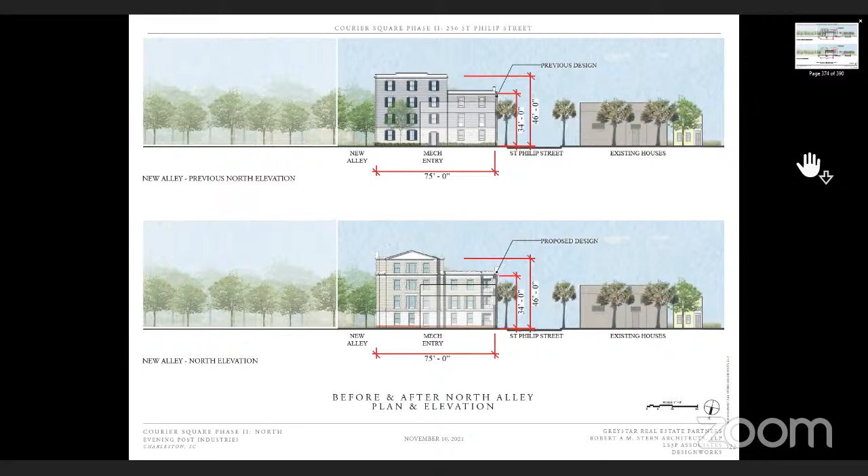And then finally, the north elevation, the before and the after. With the plan and how the 4-story pavilion is treated at this location.

And again, this is treated as a singular expression with a Serlian window at the 4-story mass that's on center with double hung windows that balance that facade.

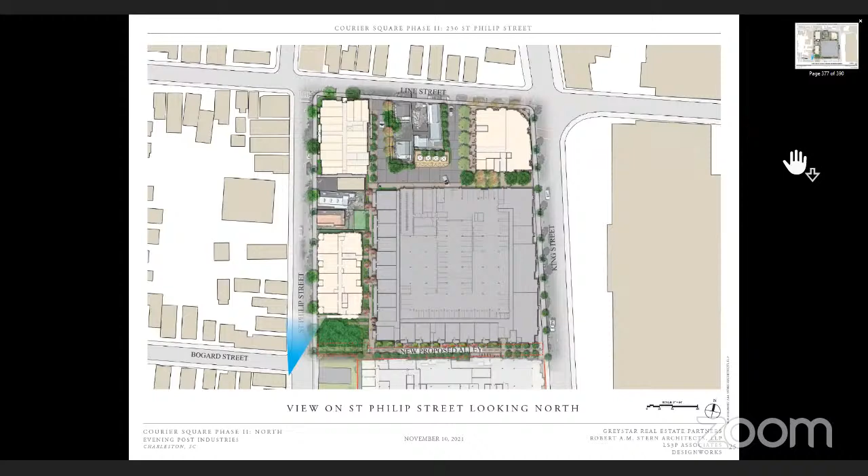And the perspective view. So the existing view.

And then the proposed design showing the porches and the changes to a single expression, but also the carving in at the 2nd and 3rd floor to give light and shadow and depth and activity, and to help break down the scale of the building facing towards St. Philip Street. And on the south facade, you can see the new oak park with the large relocated oak tree, primarily buffering the height of the 4th floor.

Next, please. And Rich, you want to talk about the zoning envelope?

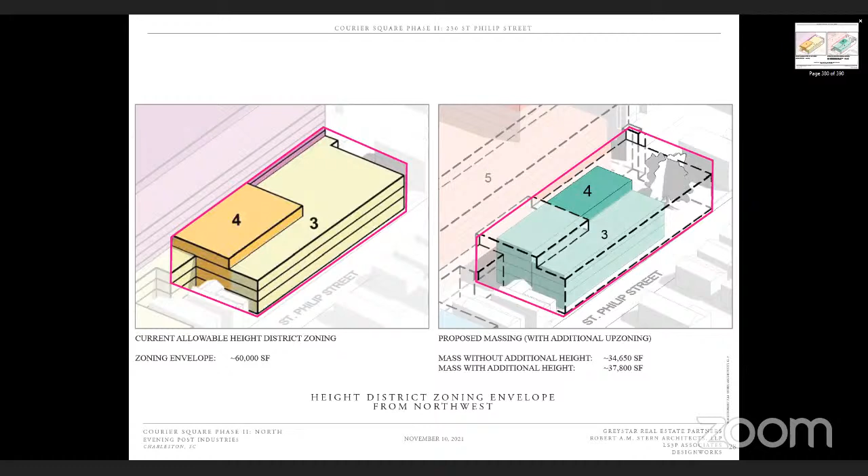Yes, so in this zoning envelope, we are requesting an additional floor. But as you can see, with the reduction in the footprint because of the tree and the park and the amount of setback, there's a significant reduction in the overall mass that the building could be. So the square footage of the proposed design is actually less than the square footage of if the entire zoning envelope was filled, right, Rich? Yeah, well said, Gary. Thank you. Okay, thanks.

So that concludes our presentation. Because this is a case where we're asking for additional height, we feel it's important to address the points of merit that show we're deserving of that.

First, by locating the parking on another part of the site, it affords us the ability to create a better ground floor. The park with the grand tree affords us the opportunity to make a grand front to the building on a park, like many of the buildings around Colonial Lake, have names and front doors. We feel that's an opportunity for very high styling on that park space.

We feel that with the deeper balconies and the high quality detailing and materials we're trying to employ here, that's meritorious. A lot of the Charleston guidelines have been followed — it has sincere attempts at base, middle, top, and verticality.

And I think the other thing that goes unsaid — these are multifamily buildings, and yet a lot of the ground floors are treated with a rhythm and cadence so that they have individual entries to better mesh with the neighborhood rhythm and streetscape. I think that's been artfully done.

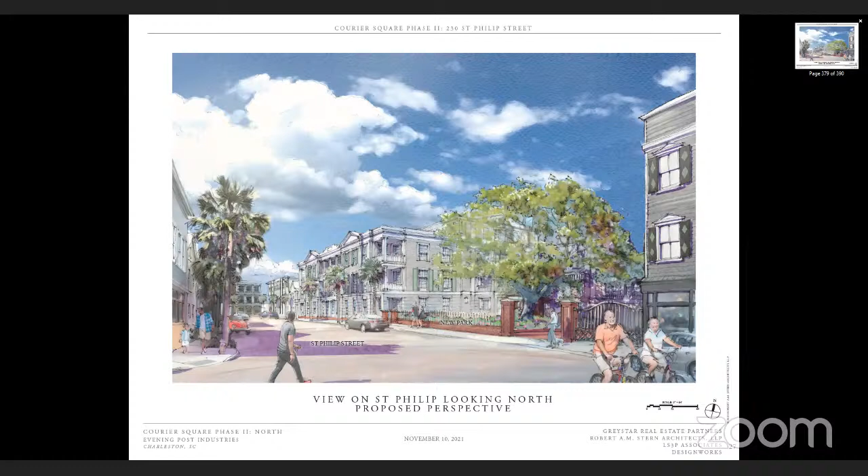This is Justin Schwebler at the Historic Charleston Foundation. The applicants have made notable improvements to this design. We feel that the architectural direction and the street engagement has substantially improved. We do have concerns over the addition of porches to the north and their impact on the residents of 236 St. Philip Street. We would like to see some sort of horizontal screening on the north side of those porches to maintain their privacy from the new structure.

Like the other buildings we've seen this evening, we feel that the singular expression has made for a much stronger overall design, and we would recommend conceptual approval of the designs as submitted. Thank you. Thank you, Mr. Schwebler. Further public comment, Ms. Parrish? Mr. Hawkins.

Thank you, Tori. Mr. Chairman, fellow board members, Marion Hawkins, President of Cannonborough Elliotborough Neighborhood Association. We also would like to thank the applicant for working with the neighborhood throughout this whole process for all of Courier Square Phase 2. We also feel the applicant has greatly improved the design of this building by creating a single expression instead of multiple. And we also feel the general massing, scale, and articulation has been greatly improved and is a worthy design.

Our only concern is the wood siding in the upper floors for a building of this scale. We would recommend consideration of stucco throughout the whole entire building exterior. We would echo Mr. White's example of the education building on St. Philip's and Wentworth. It has not weathered well for a large building of that scale. But this design is a wonderful improvement. We think it's an excellent design.

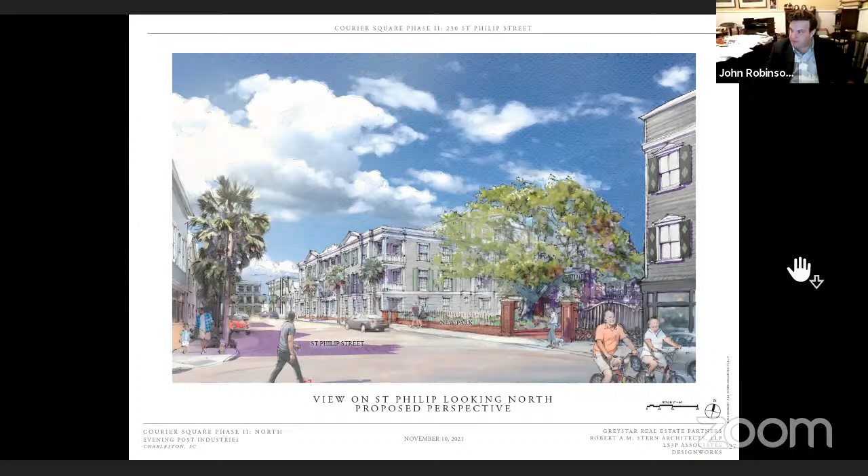Thank you, Mr. Hawkins. Further public comment? That concludes the public comment. All right, we'll move to city staff comment, same recommendations.

Number one, the use of a single expression is an improvement. Number two, the building appears to use a rusticated base of limestone or stucco with joint work, consuming the first floor. However, there's also depicted a brick base at what might be a turned-down slab edge, confirm material at first floor. Number three, provide additional recess to the center portions of the long facades to improve the massing.

Four, confirm the basic window sizes for scale concerns. Five, use consistency with shutter application. And the recommendation is deferral for slight massing modifications and resolution of scale concerns with board and staff comments.

Thank you, Tori. The applicant has their five-minute response period if they would like to use it. We'd like to thank Historic Charleston, the Preservation Society, and CENA for working with us in supporting the proposed design. We look forward to board comments, and as always, moving into the next phase, we plan on addressing the comments that come up during this review if the project is approved with those comments. Thank you again to everyone.